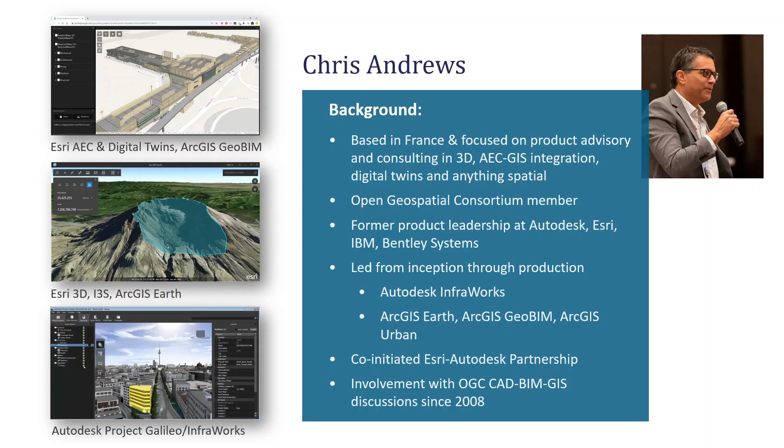I was really happy to be able to speak at this EuroSDR event that was directed toward national mapping and cadastral agencies, and that's why you'll see some positioning around that in this talk. Many national mapping and cadastral agencies probably haven't even heard about this acronym BIM.

Fundamentally, we lack enough resources to create and maintain all of the assets and infrastructure that will be required to support sustainable human habitation over the next coming decades and even centuries. Building information modeling was introduced a couple of decades ago in the architecture, engineering, construction world as a project management process for collaboratively creating and maintaining assets using detailed information throughout plan, design, and build. And what we've also seen is the intent of BIM has started to also filter forward into operations of buildings as well.

For a few decades, practitioners familiar with both geospatial and BIM have understood that combining these two disciplines can lead to even greater accuracy around risk analysis and cost savings during planning and pre-construction, better coordination of design and construction across and within sites, and higher likelihood of compliance with requirements around everything from energy to environmental impact, safety regulations, and much, much more.

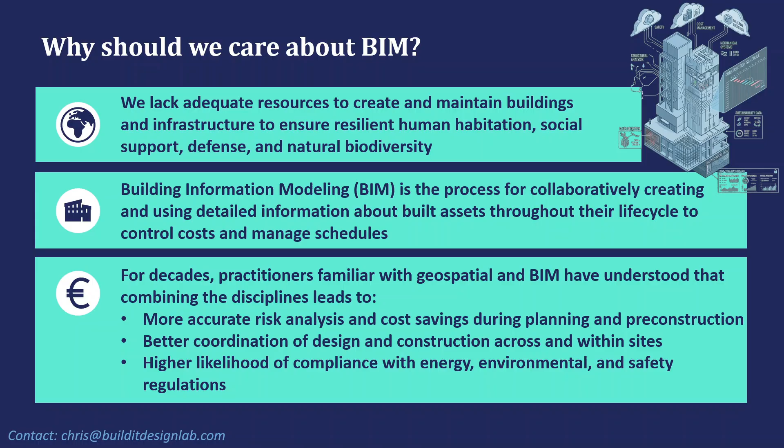A lot of this was kicked off in earnest by the UK, who implemented something called PAS 1192. One of the standards within that included a requirement for large construction projects to be built in geospatial context, which triggered a whole bunch of new interest in bringing together GIS and BIM processes. And we've really seen that explode over the last 10 years or so. So whether or not you're aware of BIM, BIM is happening in your country, and you have the opportunity to potentially influence it.

So the role that NMCAs are going to play in the conversation is specifically to be the owners of the spatial perspective on sustainable growth, natural resources management, sovereignty, and society within your national territorial boundaries. You can help influence and in some cases even set requirements and guidelines for the use of geospatial in construction, renovation, and even operations of buildings and assets within your country.

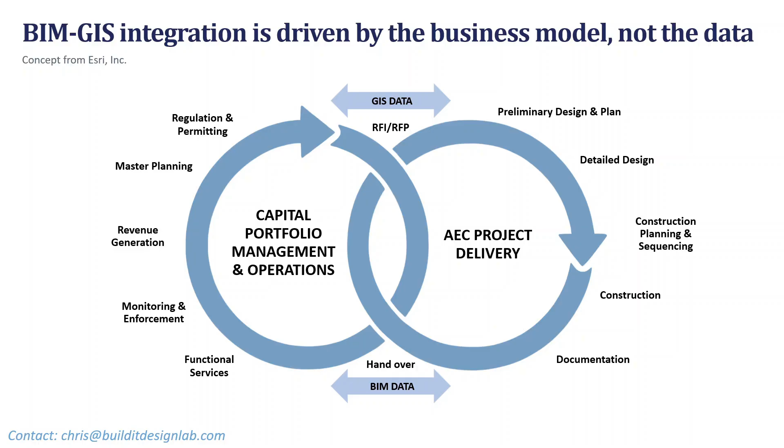When I talk about BIM data, I'm typically referring to 3D and sometimes 2D design data that is used to construct and in some cases maintain or otherwise modify infrastructure and buildings. In reality, BIM data can include schedules, bills of materials, inventory lists, safety inspection reports, and many other types of data that may not be initially intrinsically geospatial, but which often can be tied through 3D and 2D design data and geospatial information in order to view it in broader project context.

When it comes to the 2D and 3D design information that we're going to talk about here, we'll mainly focus on something called IFC, which is an open standard that is maintained by buildingSMART International, and which contains a rich schema and semantics for identifying not only the 3D components of infrastructure and buildings, but also many of the metadata and attributes about every little piece of those buildings and infrastructure assets.

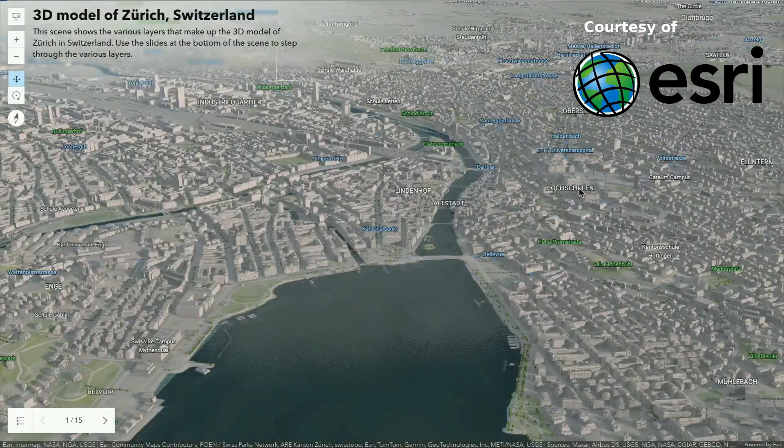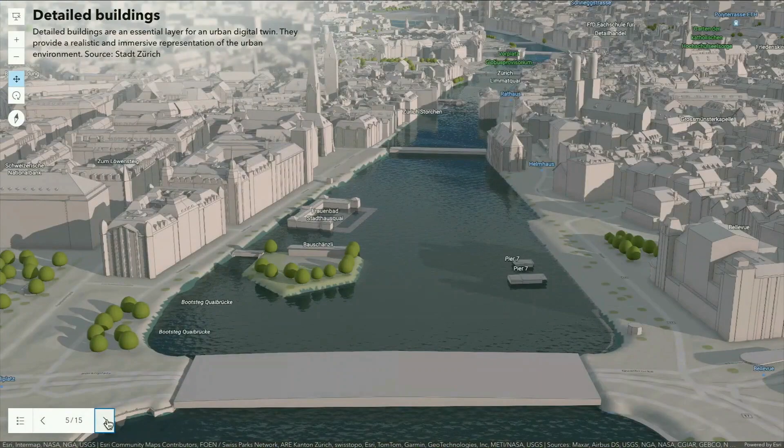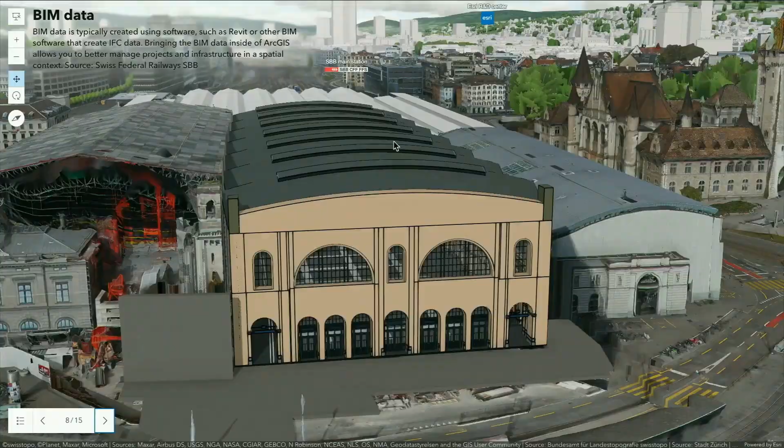Before I dive in any further, I'd like to just show a couple of quick demos here. This one was given to me by a team at Esri, and what you can see in their web experience is that they support bringing together many different types of geospatial information, including things like LOD2 buildings, points for trees, surfaces that can have nice textures for things like water. And you'll see they can bring in reality capture meshes, which is what we see here. And even within those reality capture meshes, they can then bring in detailed BIM information, such as this train station. On top of that information, you can actually inspect it to see the metadata about the BIM itself.

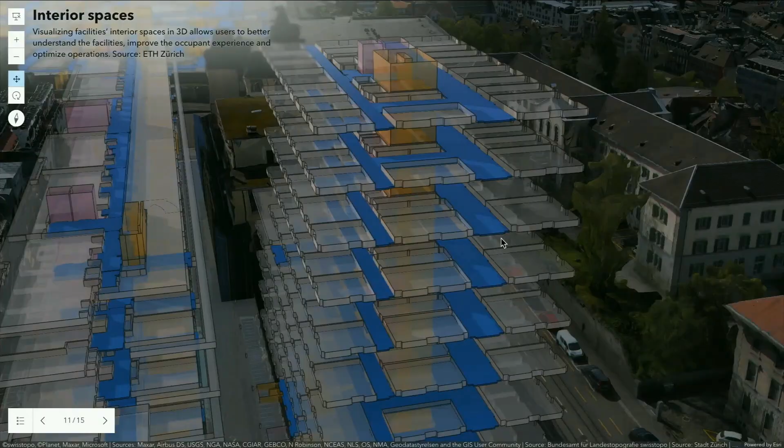And then you can even do things like overlay point cloud captures. So within the Esri-based experience, you can see that you can bring in a whole bunch of different types of geospatial data, basically handle the data as it was originally designed, and then create experiences with the data in geospatial context.

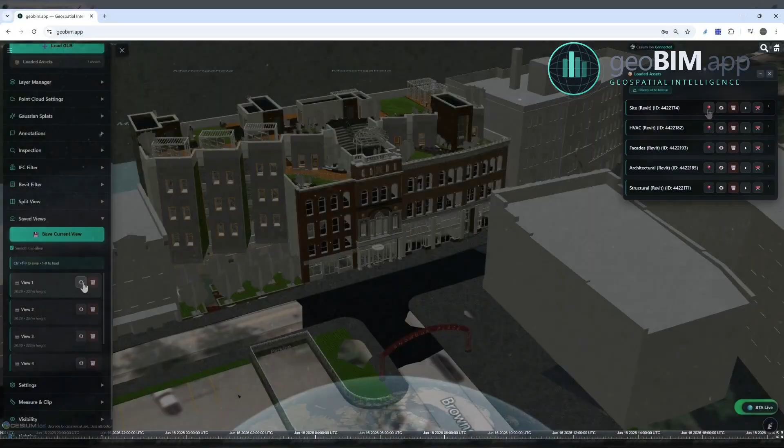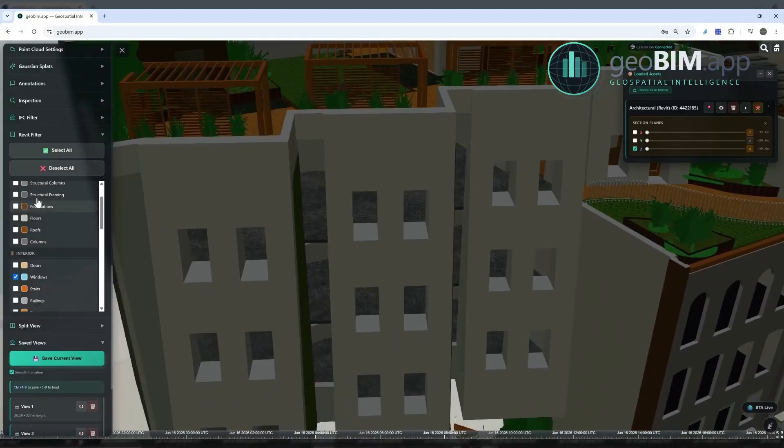Christophe Lawrence lent me this video showing an application that he built that brings together 3D Tiles with the help of CesiumJS. In this CesiumJS experience, you can see Christophe has brought in Cesium's global data, a BIM model, and other 2D and 3D information to put a building in geospatial context in a global scene. And you can see that Christophe has used some of the tools that he has available to create an experience for browsing metadata on the BIM model, looking at individual assets within the model, and then actually performing other analyses and exploration on and around that BIM data itself.

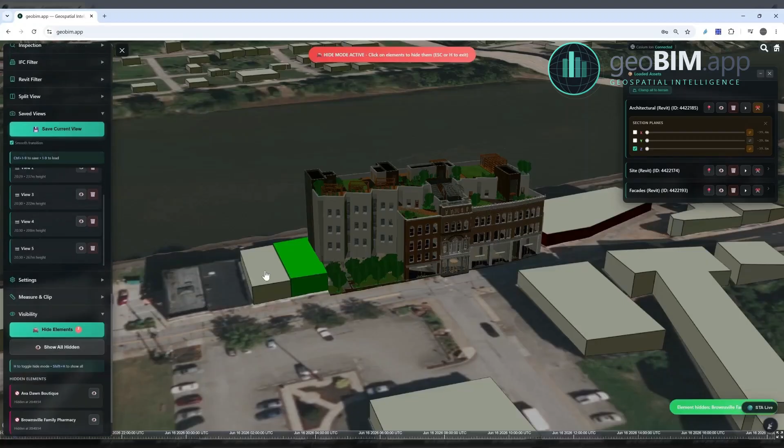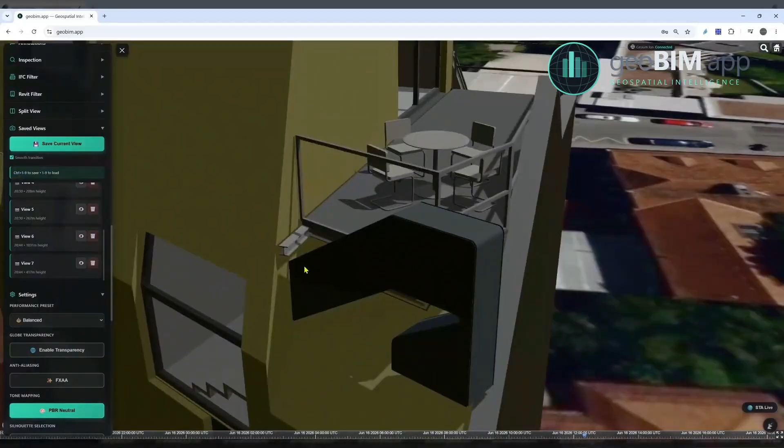In this case, Christophe has basically substituted a whole new site around an existing building, and then he's going to show some other interaction with the scene that's possible within Cesium. So in both of these experiences, what we've seen is you can bring together a variety of types of geospatial information, put it on a globe, or in the case of Esri, put it into a local Cartesian scene, and then perform analysis and inspection on BIM data in the context of a full geospatial experience.

When it comes to 3D formats, there are many different formats out there. When you're talking about bringing together BIM and GIS information, you're often focused on a few specific formats that might include things like IFC and I3S and 3D Tiles that we've already discussed. And then you'll also hear about things like CityGML or a derivative called CityJSON that is a well-established standard for representing buildings, not typically at BIM level of detail, but it's been in use for quite a while now.

Khronos Group is a graphics-oriented standards group that maintains this thing called glTF, which is kind of like the payload format that is used within 3D Tiles and which can be used in I3S as well. And then you may also hear about things like Universal Scene Description, which has been promoted heavily by NVIDIA in the last few years. It was originally created by Pixar with the help of Autodesk and others for representing very large film and game scenes, and it's being adapted for use in robotics, CAD BIM applications, and in many other ways.

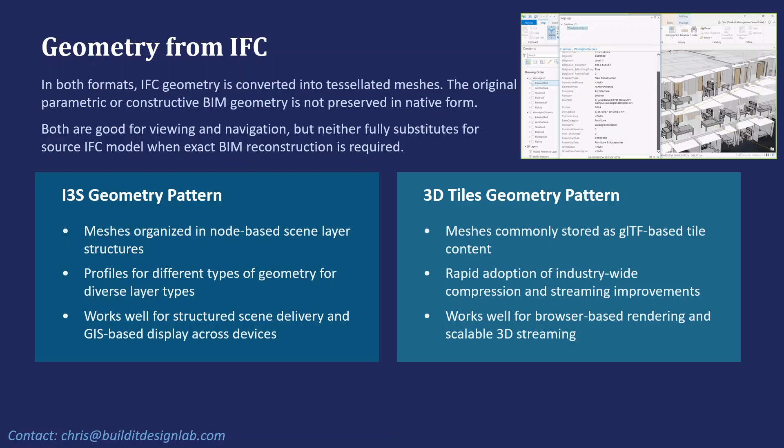What about all the metadata coming across from BIM information? So I3S has very strong support for feature-based identity and attributes. As we said, I3S already includes a profile for specifically storing BIM information, and this profile can be used for storing other types of physical infrastructure assets as well. And it's useful for keeping IFC properties queryable inside a GIS-style scene.

Georeferencing is definitely one place where I3S today has a leg up. I3S explicitly supports a wide variety of coordinate systems, and this can be helpful when BIM needs accurate placement into larger GIS scenes, and when you're working in an environment that has statutory requirements for specific coordinate systems.

3D Tiles has a strong metadata system with very flexible attachment points. It can be used to preserve a broad subset of IFC properties, but it is also going to be more heavily dependent upon custom export and conversion processes. Georeferencing today for 3D Tiles, you can support local and global spatial placement within tileset structure. Georeferencing can be good, but depends more on export workflow conversions and conventions. And as I said, most of the apps that actually consume 3D Tiles typically will be WGS84 global experiences.